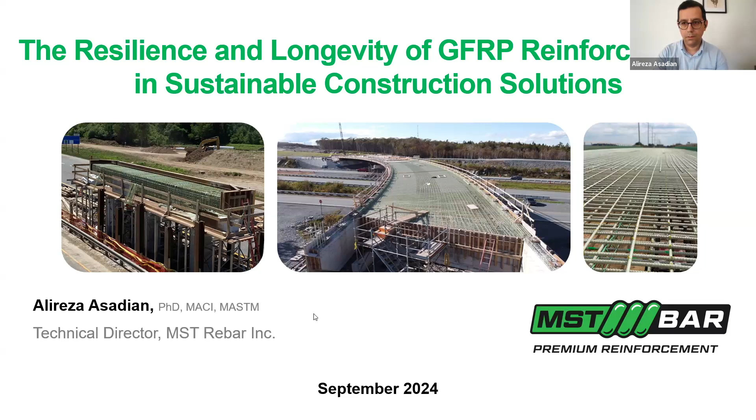In this presentation, I will give a brief introduction about GFRP bars and the benefits of using GFRP bars. I will then talk about the available standards for material specification of GFRP bar, as well as the available standard for the design of GFRP reinforced concrete. I will show some case studies on the longevity, durability, and sustainability of GFRP reinforced concrete. Then I will talk a little bit about the carbon emission associated with the use of GFRP reinforcing bars in concrete structures.

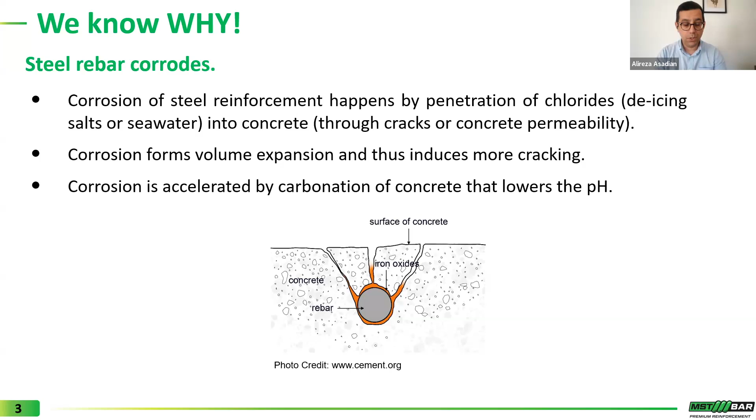Corrosion of steel reinforcement happens by penetration of chloride into concrete. Corrosion forms the volume expansion of the rebar and can induce more cracking, cover spalling, and exposure of internal reinforcement to aggressive environmental conditions. It's also important to know that corrosion is accelerated by carbonation of concrete, which lowers the pH environment of the rebar.

Corrosion can also result in degradation of the strength of the structure over time, which can result in catastrophic failure. For example, this is a picture of a parking garage that collapsed back in 2008 in Quebec, Canada. This incident unfortunately resulted in one casualty. The main reason for the collapse of this parking garage was the lack of regular maintenance to prevent the corrosive effect from de-icing salts.

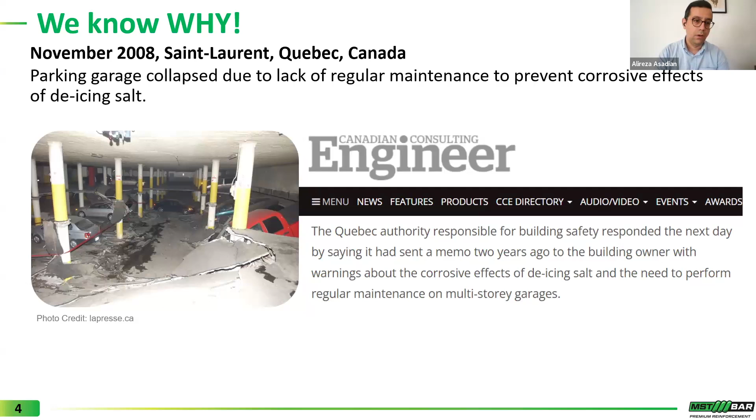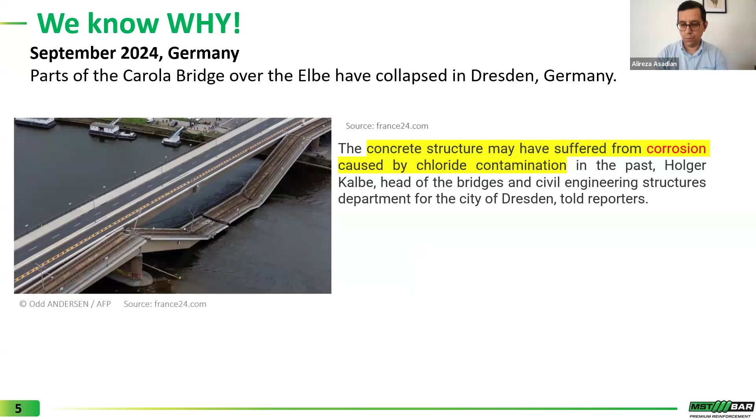Another more recent incident happened in Germany: the partial collapse of a bridge may have been caused by chloride contamination in the past.

Obviously, engineers are aware of the issue of corrosion. They take additional measures to mitigate the issue of corrosion in reinforced concrete structures.

I don't know if you see the cameras on the right side. It's a bit distracting for me.

Engineers take additional measures to mitigate the issue of corrosion in reinforced concrete structures. Those measures include, for example, use of corrosion inhibitor admixtures in concrete, or use of alternative reinforcing bars such as epoxy-coated, galvanized, or stainless steel rebar, use of sealers and membranes on concrete surface, or providing additional concrete cover, and so on and so forth.

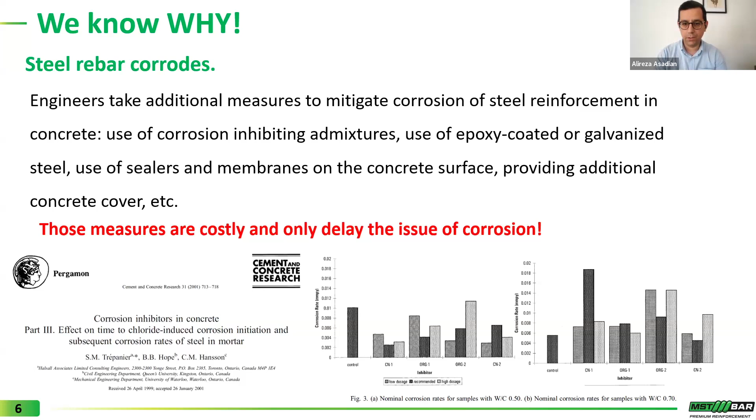It's important to know that those measures are, first of all, costly. They will add to the initial cost of the project. More importantly, research has shown that many of those measures can only delay the issue of corrosion in best case scenarios and will not eliminate the corrosion issue in reinforced concrete structures.

That is why we think the use of MST bar or fiberglass rebars will, first of all, address the issue of corrosion in reinforced concrete structures, and will add many other benefits that I will talk about in this presentation.

Now, what is a GFRP bar made of? Glass fiber reinforced polymer bars are a composite material made of fibers and resins. There are many types of fibers and resins available in the market, but what is of interest from an economical and durability point of view is glass fiber.

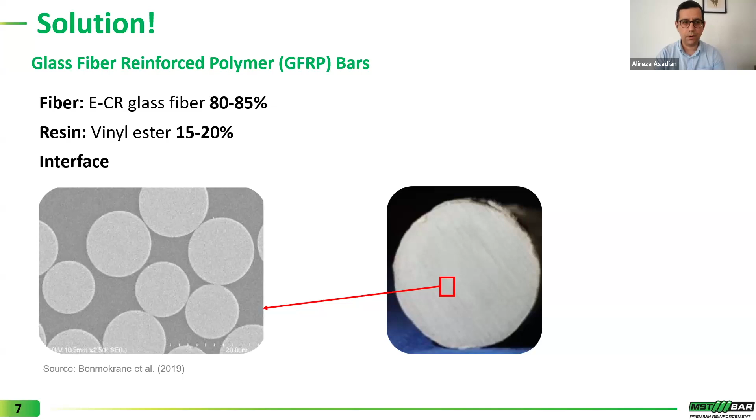We use the latest generation of glass fiber called E-CR glass fiber, and the resin that showed very good durability for construction application is vinyl ester resin. In a cross section of MST bar, or any high modulus GFRP bar, there is around 80 to 85% E-CR glass fiber, and the remainder of 15 to 20% is vinyl ester resin.

Now, what are the mechanical properties of GFRP bars versus conventional black steel rebar? GFRP bars have very high tensile strength, but lower modulus of elasticity. The material is elastic up to failure, as you can see in the graph on the right side of this slide. However, reinforced concrete elements made with GFRP bars will have very good deformability—the ability of a member to take considerable deformation or deflection before failure.

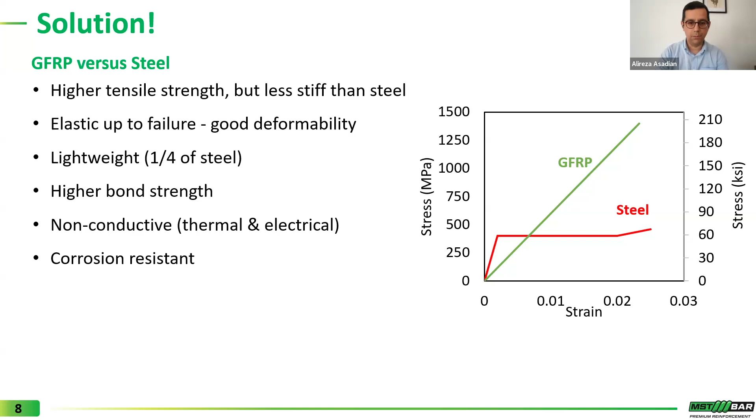MST bar and other GFRP bars are very lightweight, weighing only a quarter of black steel rebar. Some GFRP bars, including MST bar, have very good or very high bond strength to concrete. GFRP bars are non-conductive, both thermally and electrically, which can be of benefit in certain applications. And as I mentioned earlier, MST bar and GFRP bars are corrosion resistant.

In the following slides, I will talk briefly about available codes and standards in North America for material specification, as well as the design of GFRP reinforced concrete elements. It's very important to know that not all GFRP rebars available in the marketplace can be used in construction applications in North America. GFRP bars must meet the requirements of ASTM D7957 in the US, and in Canada we have a similar standard.

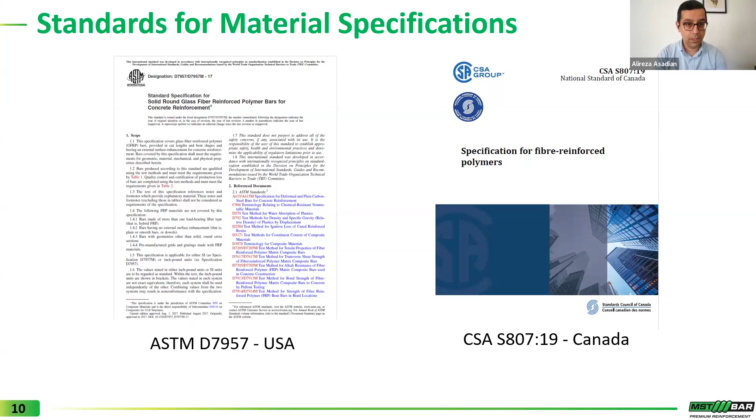It's more stringent than ASTM D7957, called CSA S807. Some ministries of transportation in Canada and some departments of transportation in the US have their own material specification requirements that the manufacturer needs to comply with in order for their product to be eligible to be used in their projects. Now, what are the requirements of all those standards?

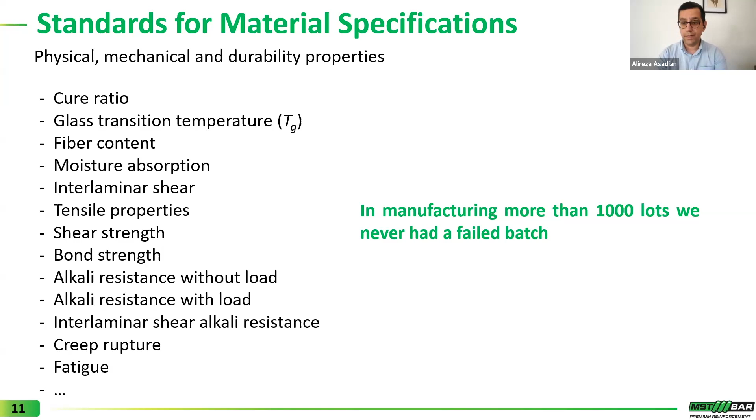When it comes to design of GFRP reinforced concrete, the most recent code is ACI 440.11-22. This code was released in September 2022, and it's essentially building code requirements for structural concrete reinforced with GFRP bars. ACI 440 is what's called a sister code to ACI 318, meaning that the chapter numbering, section numbering, and code language is very similar to ACI 318-19.

For highway bridge design, AASHTO has the AASHTO LRFD bridge design guide specification for GFRP reinforced concrete. In Canada, for building design, there is a standard called CSA S806, for design and construction of building structures with FRP. Chapter 16 of CHBDC, the Canadian Highway Bridge Design Code, has some recommendations and clauses for the design of highway bridges with FRP.

So in the following slides, I would like to show you some case studies on durability, longevity, and sustainability of using GFRP bars in construction applications.

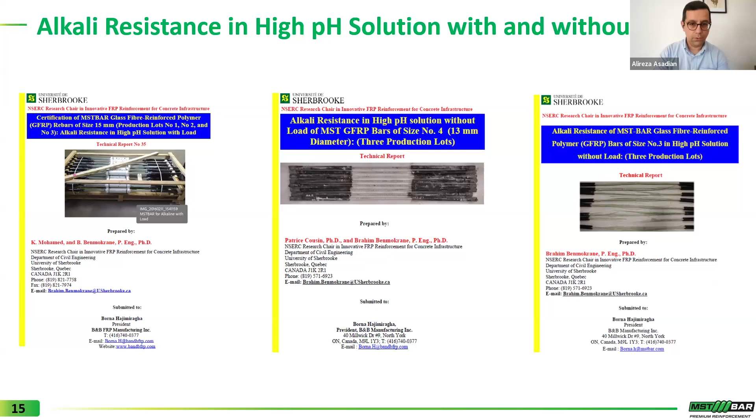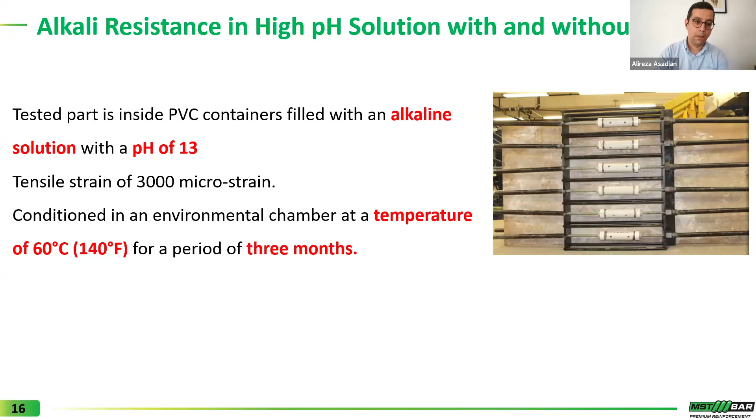One of the durability tests that is done based on CSA S807 is resistance to alkali, and this test is done two ways: one with load and one without load. In the with-load test, the rebar is exposed to an alkali solution with a pH of around 13, very high pH values, and then it's under a constant stress of 3,000 microstrain. The rebar is conditioned in an environmental chamber at a temperature of 60 degrees Celsius, or 140 degrees Fahrenheit, for a period of 3 months, and then the conditioned or aged rebar is tested to check the tensile strength as well as modulus of elasticity retention of the rebar.

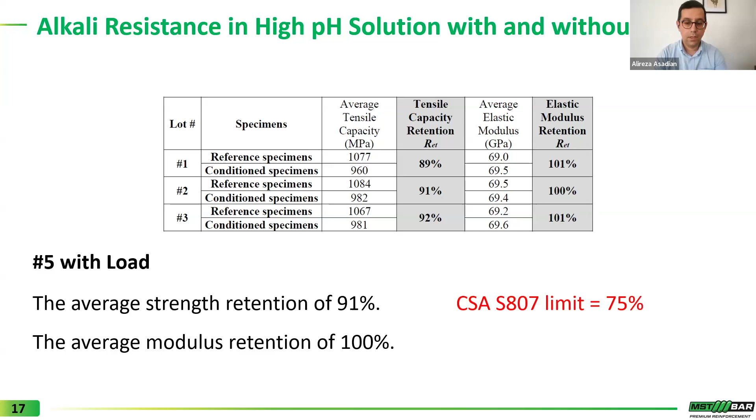What you see here is a table showing the alkali resistance of number 5 MST bar under load. This test was done at the University of Sherbrooke in Professor Brahim Benmokrane's lab. As you can see, the average strength retention of MST bar was around 91% of ultimate tensile strength, and the average modulus retention was 100%, meaning there was no reduction in modulus of elasticity due to exposure to the alkali solution. For your reference, the limit in the CSA S807 material specification standard is 75%.

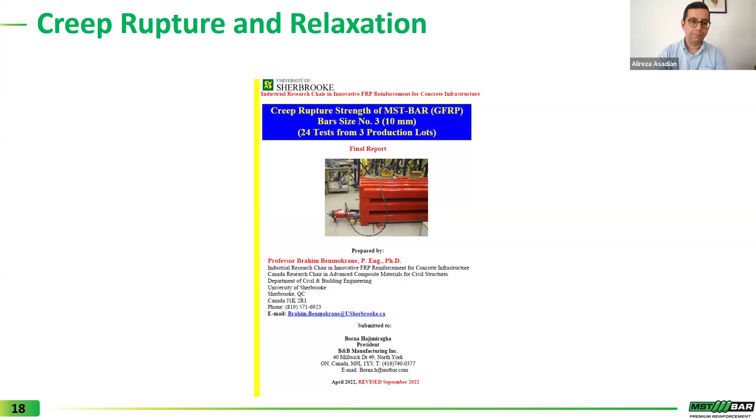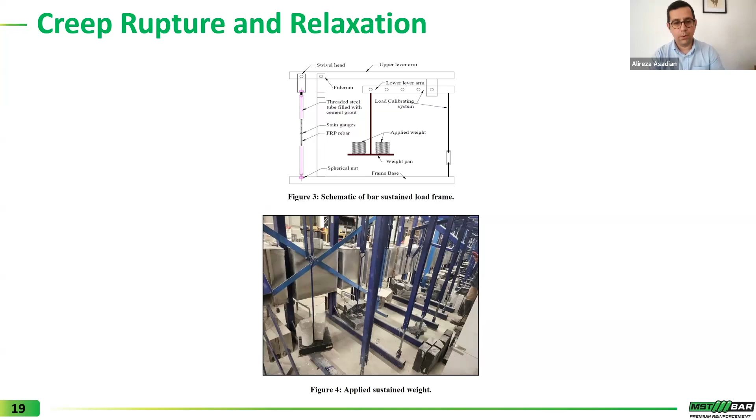Another concern with GFRP bars is creep rupture, or the effect of creep over the long term on the rebar. Again, we have done many tests at University of Sherbrooke with Professor Brahim Benmokrane. In this test, the rebar is under different levels of sustained stress, and then the time to rupture of the rebar under each stress level is measured or recorded, and the experimental data is extrapolated to see the creep rupture limit for MST bar or any other GFRP bars.

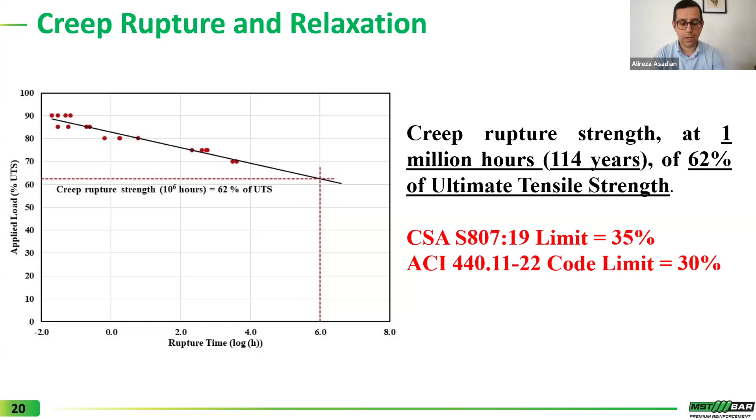As you can see in this graph, the creep rupture strength at 1 million hours, or 114 years, for MST bar was around 62% of ultimate tensile strength. For your reference again, the limit in CSA S807 is 35%, and the limit in the ACI 440.11 code used for design of GFRP reinforced concrete is 30%.

Another long-term effect on GFRP reinforced concrete elements is the effect of fatigue under repeated loading. That is important, for example, for bridges or any other elements that are subjected to fatigue loading. Again, we have done some fatigue tests at the University of Concordia under the supervision of Professor Khaled Galal.

So this is a video showing the last few cycles of one of the tests. In this beam, the maximum stress in the MST bar was around 400 MPa, meaning around 60 KSI, and the beam was under fatigue loading at a frequency of 2 Hertz, meaning 2 cycles of loading and unloading. This beam survived 2 million cycles of loading and unloading, and then the test was stopped since no failure was observed. Here are the last few cycles of that beam test.

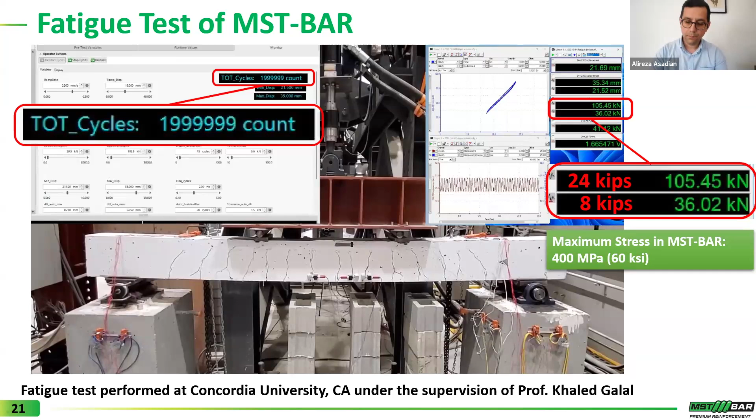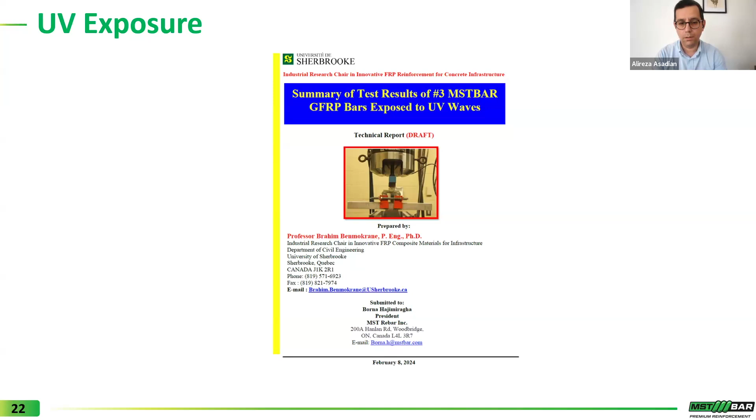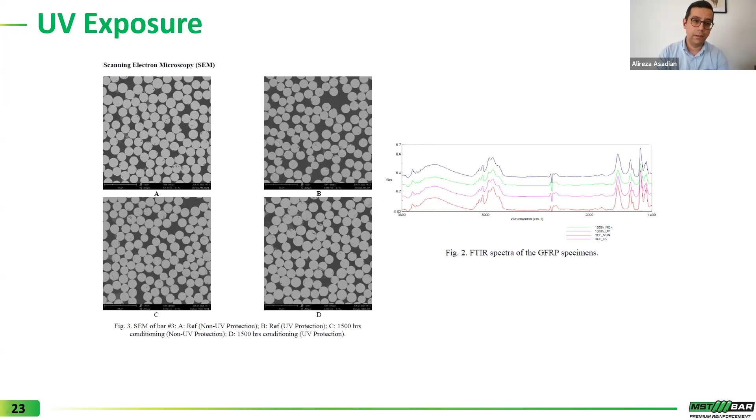The effect of UV exposure is another concern for long-term exposure of GFRP reinforced concrete. We've done some load testing and UV exposure testing with Professor Brahim Benmokrane. In this test, samples of MST bar were subjected to UV light for 1,500 hours as well as 3,000 hours, and then scanning electron microscopy (SEM) analysis as well as FTIR and interlaminar shear strengths of the samples were measured.

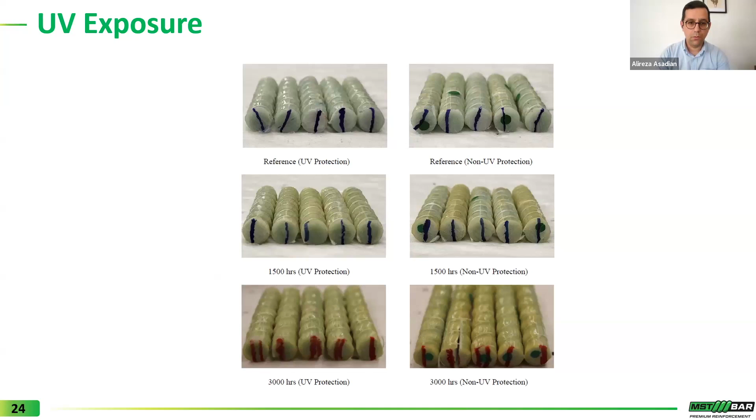As you can see in these pictures, some discoloration was observed as a result of exposure to UV lights. However, there was no degradation in terms of mechanical properties on the rebar, and this report concluded that there was no effect on the horizontal shear strength of MST bar due to UV exposure.

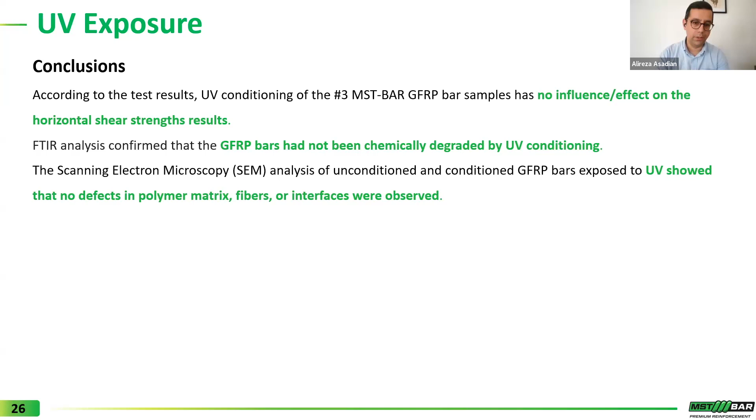The FTIR analysis confirmed that GFRP bars had not been chemically degraded by UV conditioning. Also, the SEM analysis of conditioned and unconditioned GFRP bars exposed to UV showed no effect on the polymer matrix, fiber, or the interface.

Apart from laboratory testing, there have been several real-world case studies showing the good performance of GFRP rebars under real load conditions. The first case study I'd like to present is a Ministry of Transportation of Ontario bridge, called Third Concession West Underpass over Highway 401 in Ontario.

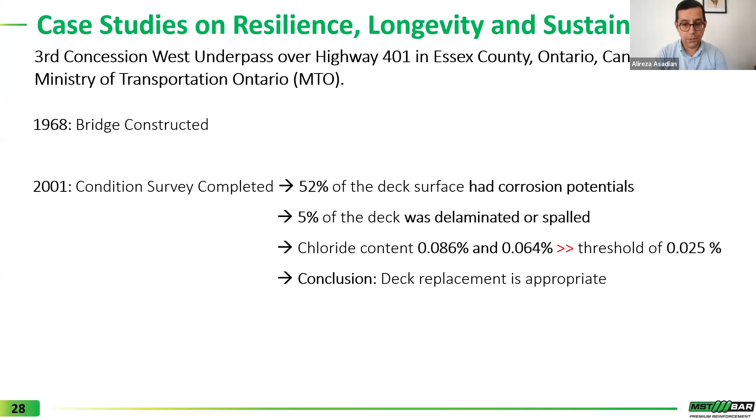MTO also did cost analysis for the bridge, and found that the initial cost of the bridge deck, without considering any savings over the life cycle, was very similar to similar scale bridges built around the same time, showing that GFRP bars, even back in 2008, were not that expensive compared to steel rebar.

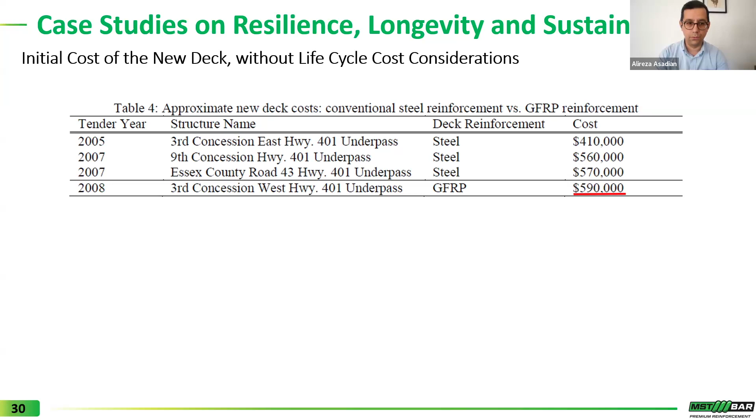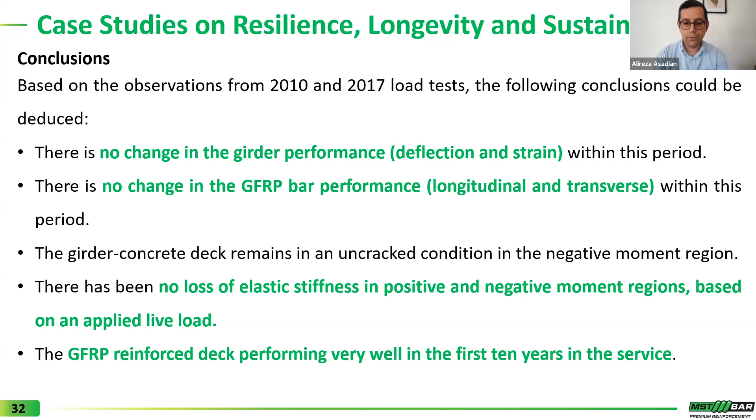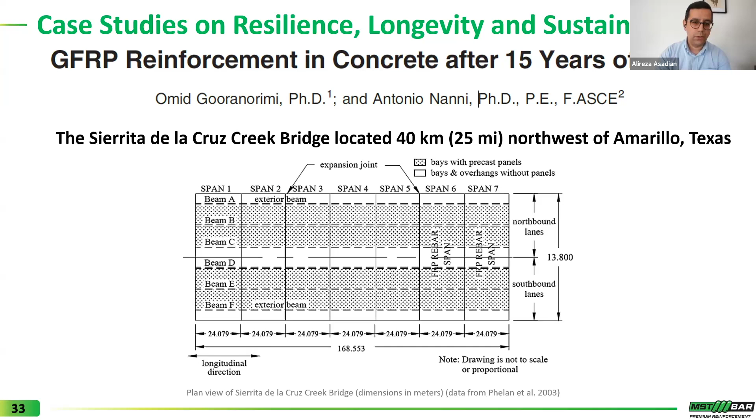Another case study, led by Professor Antonio Nanni, is on a bridge in Texas. Similar to the previous study, they did some core sampling and performed microscopic analysis as well as some shear tests on the samples.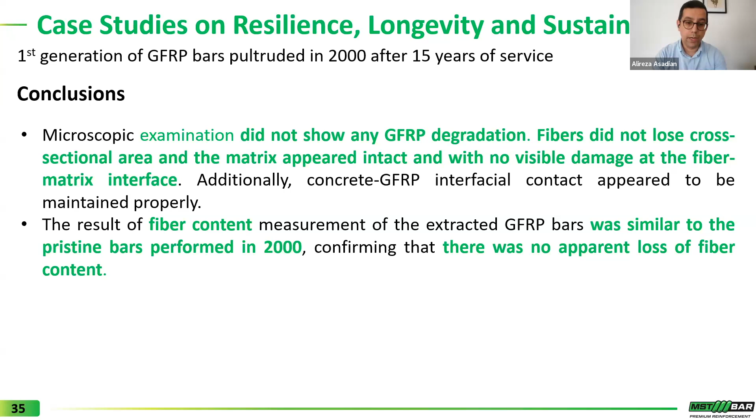Again, similar to the previous project, they concluded that the microscopic examination did not show any GFRP degradation. Fiber did not lose any cross-sectional area, and the matrix appeared intact with no visible damage to the fiber-matrix interface. The fiber content was also similar to the pristine bar from 2000, confirming there was no apparent loss of fiber content for the rebars in this application.

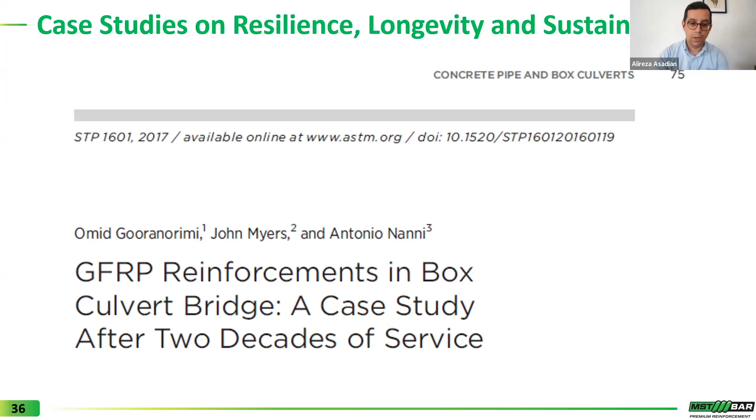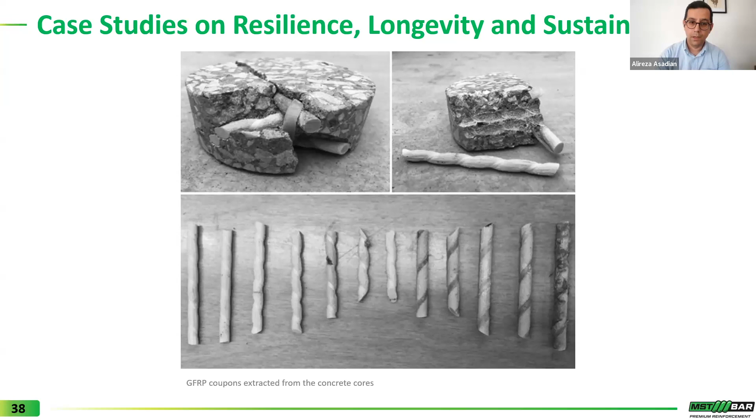They did SEM image analysis, and similar to the previous project, concluded that microscopic examination did not show any GFRP degradation, and fibers did not lose any cross-sectional area. The matrix was intact, no damage was observed at the fiber-matrix interface, and the concrete-GFRP interface was maintained properly with no interfacial bond loss observed.

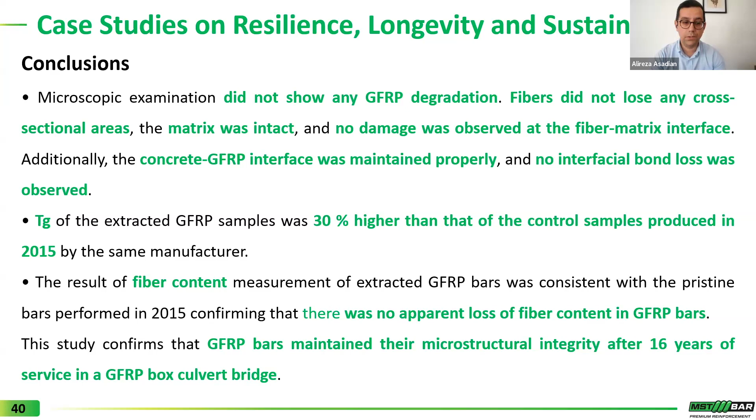Interestingly, they observed that the Tg of extracted GFRP samples was 30% higher than that of a control sample produced in 2015 by the same manufacturer. Also, similar to the previous study, the fiber content results showed no apparent loss of fiber content in GFRP bars. Finally, they concluded that this study confirms GFRP bars maintain their microstructural integrity after 16 years of service in a GFRP box culvert bridge.

In the following slide, I'd like to talk about the benefits of using MST bar and GFRP bars from an environmental impact perspective, and show how using GFRP bars can help the construction industry move towards cleaner, more environmentally friendly solutions.

As I mentioned earlier, GFRP bars are very lightweight, weighing only a quarter of a black steel rebar, so there's a quarter of the CO2 emission from transportation of the rebar to the job site. GFRP bars will also have a longer life, so less demolishing of existing structures, less energy to recycle those structures, less concrete to build new ones, and all in all, less CO2 emission.

GFRP reinforced concrete elements will be better thermal isolators because GFRP bars are not thermally conductive, resulting in less energy loss in buildings reinforced with GFRP bars. Also, it's important to know that lower energy is required to produce MST bar than steel rebar, and we'll talk about this point in my next slide.

One interesting point to mention is that chloride is not a durability concern for GFRP reinforced concrete. This will bring a lot of opportunities to the construction industry. For example, sea sand and seawater may be used to make concrete, or there may not be a need to use fresh water to make or cure concrete.

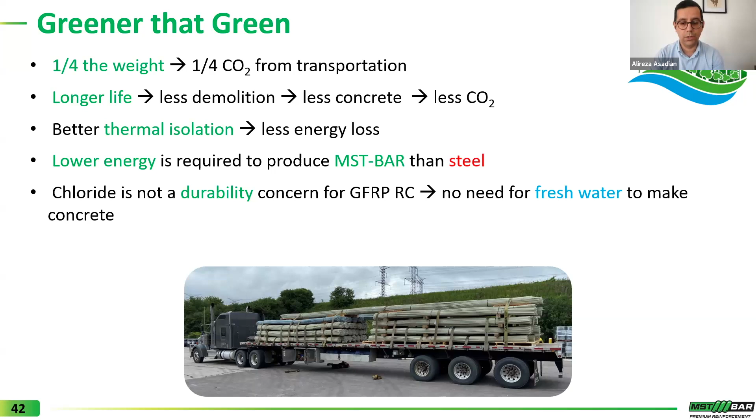I did a small case study for a slab on grade with an area of 200,000 square feet to show the difference in carbon emission from using MST bar compared to black steel rebar. This study shows that the MST bar is 400% greener compared to the GWP, or global warming potential, of average steel rebar available in the marketplace.

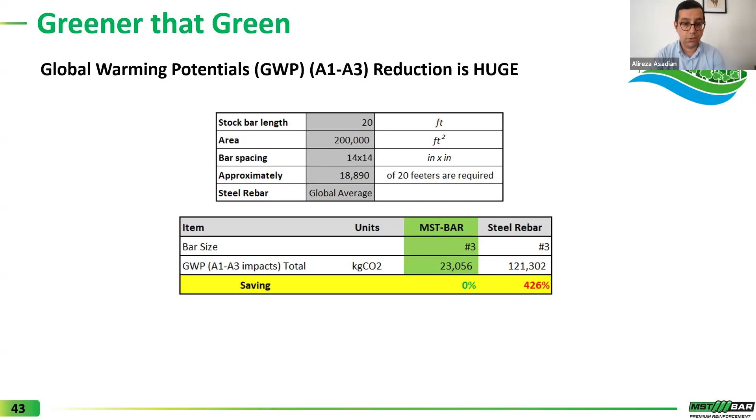And if you compare the GWP of MST bar to the cleanest steel rebars available in the market, we are almost on par with those rebars. And those steel rebars are produced with 100% recycled steel.

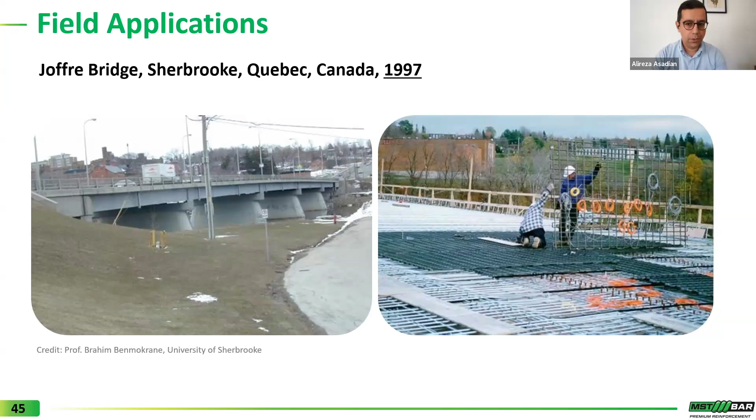Following the slide, I will show you some field applications where MST bar and other FRP bars have been used, as well as the most recent MST bar projects. The use of FRP bars started in construction back in the 1990s, but in the very first bridges, the GFRP bars were only used as secondary reinforcement, for example the top mat of a bridge deck. Over time, owners and engineers gained confidence in the use of GFRP rebars.

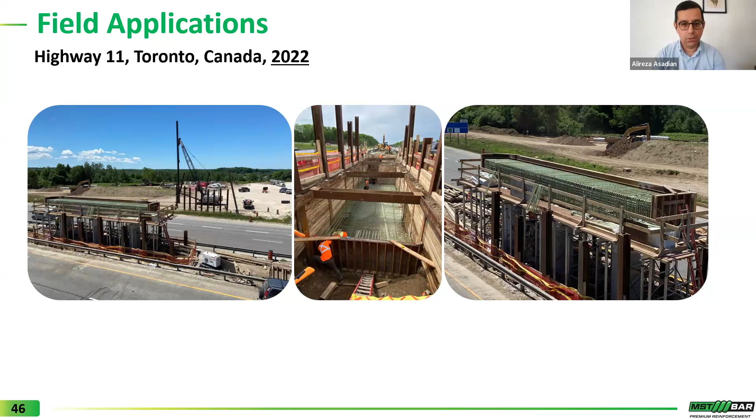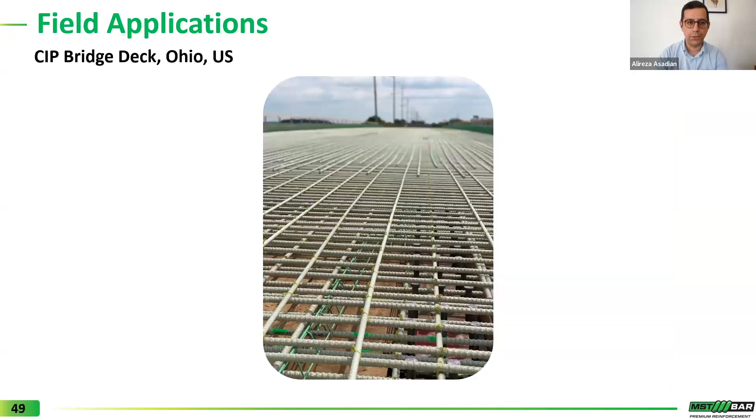I will show now a video of one of our projects in Ontario. In this video, you can see different shapes of MST bar that we can make, and also how easy handling of MST bar on the job site is. You will also see that the tying of the rebar and all those practical applications are very similar to conventional black steel rebar. Take a look at the video.

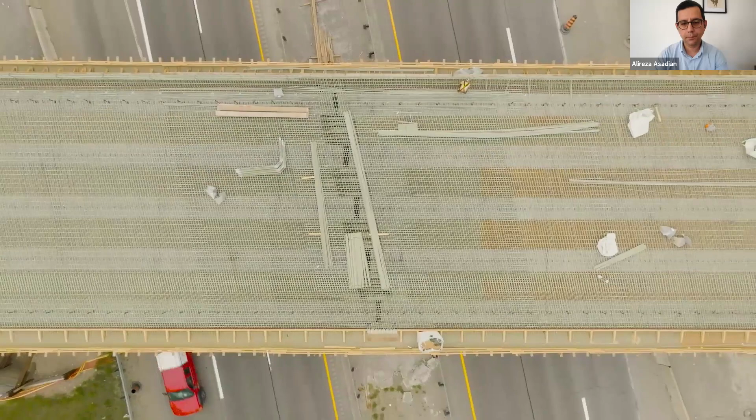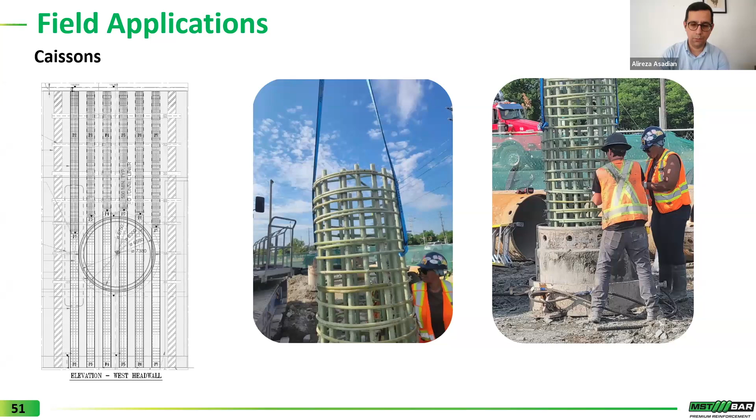Another application is in caissons for soft eyes and tunneling applications. You see a few pictures of some of our projects. This is Nickel Station in Ontario, where those caissons in the soft eye part were all done with MST bar.

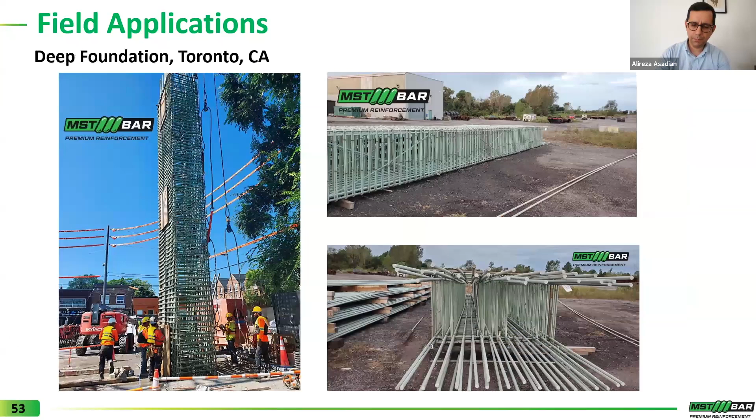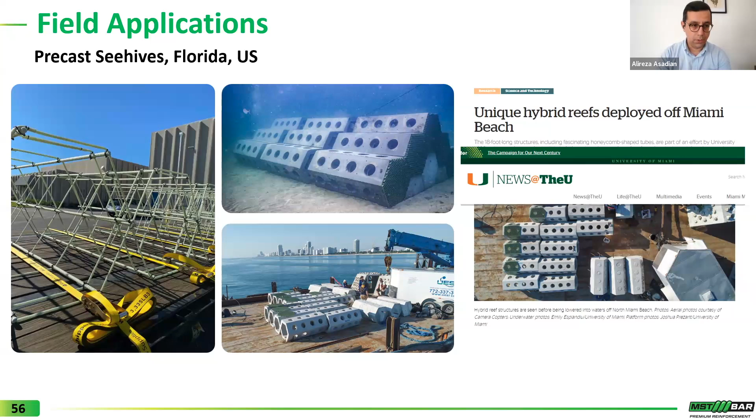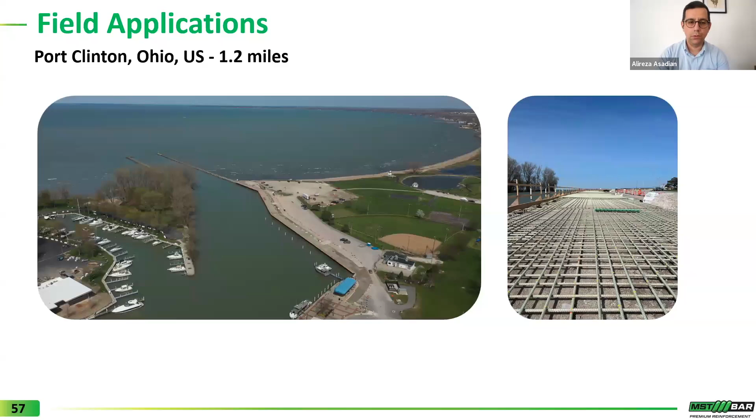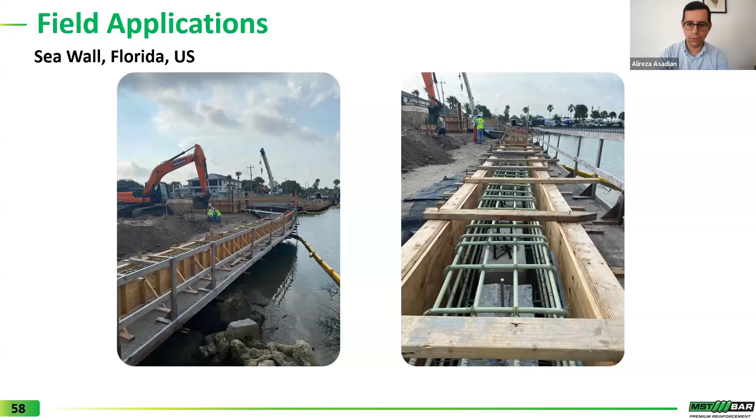Coastal constructions are another application where MST bar has been extensively used over the past. Those are pictures of Port Clinton in Ohio—1.2 miles of port was reinforced with MST bar. Seawalls in Florida are another great application for GFRP bars and for MST bar as well. You can see a few pictures of some of our seawall projects in Florida.

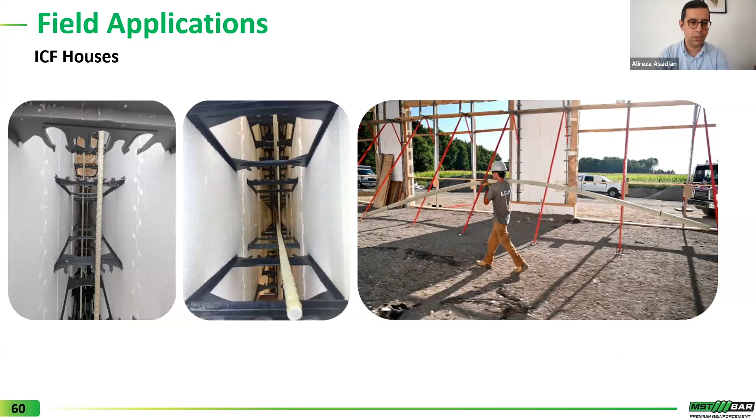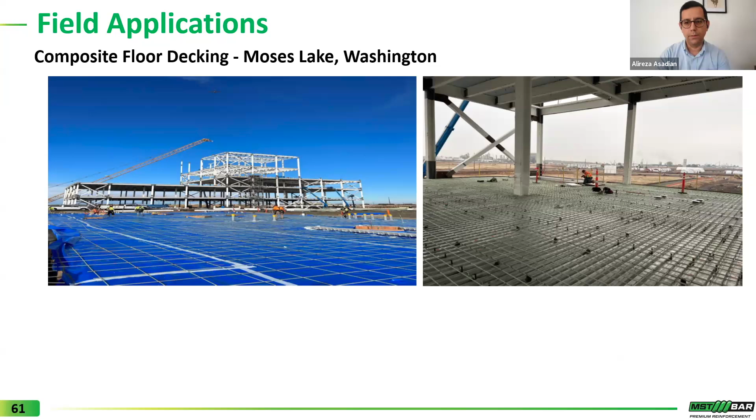ICF houses, low to mid-rise, now in Canada and the US are reinforced with MST bar. This is a picture of one industrial building with a composite floor decking system. This structure was built in Washington, again with MST bar—all the slab-on-grade as well as the composite floor decking system deck slabs were reinforced with MST bar.

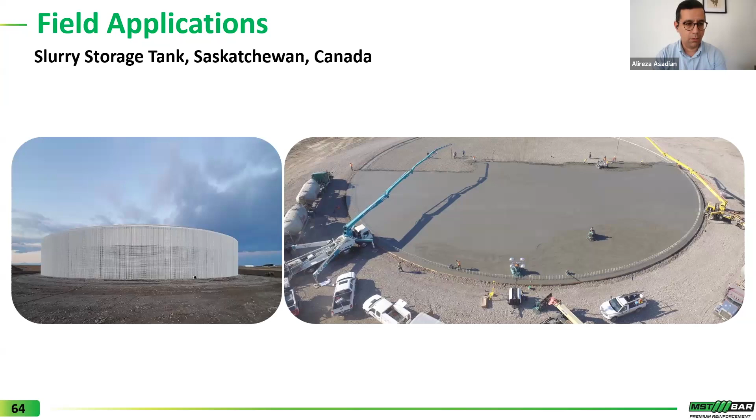Industrial buildings, another example with MST bar. Agricultural structures—these are pictures of a slurry storage tank in Saskatchewan, Canada, used to store animal waste, a very corrosive environment for internal reinforcement. This structure has been reinforced with MST bar and is now in service for almost 8 years without any durability issues.

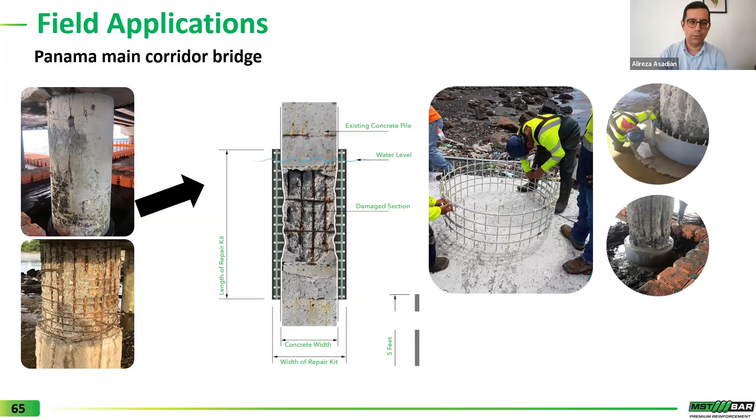MST bar is also being used for repair and rehabilitation of existing structures. These are pictures of Panama's main corridor bridge that was repaired with MST bar. Another recent repair project is a Louisiana Department of Transportation project, where MST bar was again used for the repair.

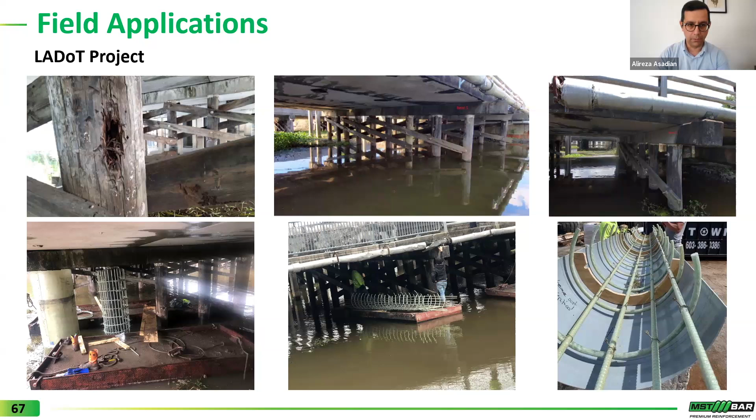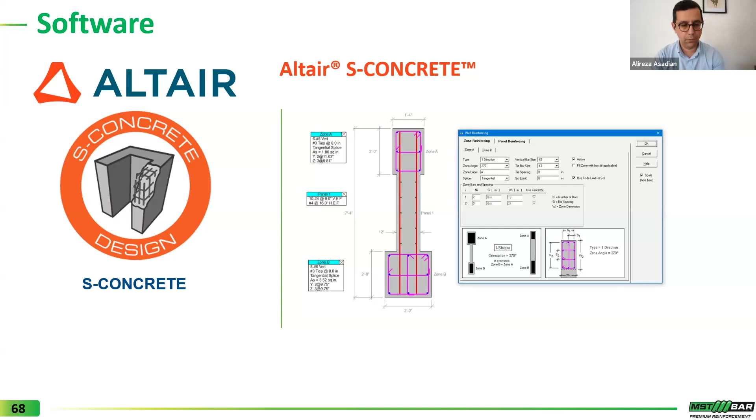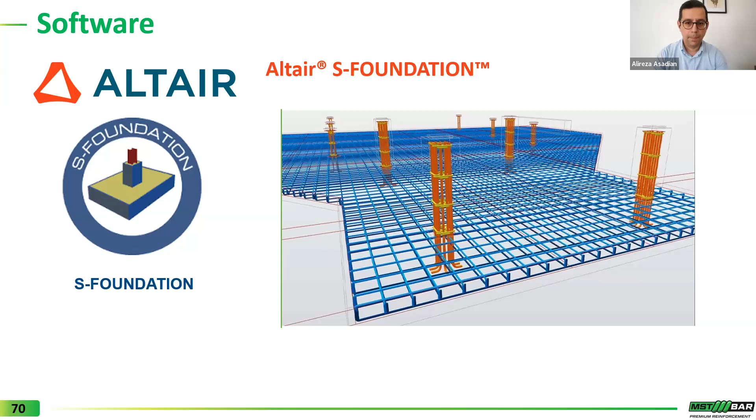One of the very big challenges for engineers and our industry was the lack of reliable software to design GFRP reinforced concrete with. We have collaborated with Altair, and the Altair team has now implemented ACI 440.11 into their product lines, including S Concrete, S Line—for design of continuous beams and slabs with steel and now GFRP rebars—as well as S Foundation. In my opinion, this is a very big step for our industry to have reliable software for design with GFRP reinforced concrete.

This brings me to the end of my presentation. I would be happy to take any questions now.